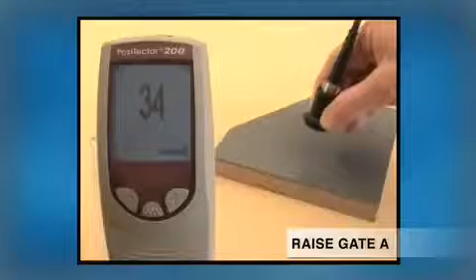First, let's explore why low measurement results occur in the first place. Microscopically, you can see the rough surface of this black coating on plywood. Under greater magnification, the surface texture on this red coating looks like hills and valleys. The dark lines in this photo are the scale markers from a destructive Tooke or paint inspection gauge. Let's discuss what happens when the PosiTector 200 measures surfaces like these.

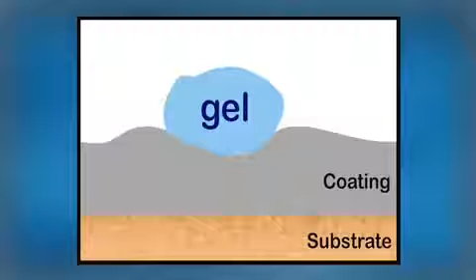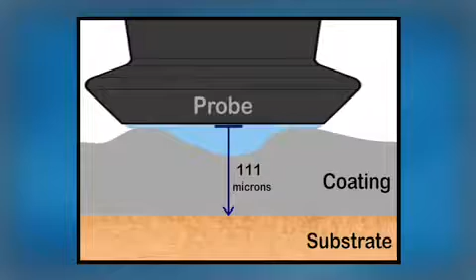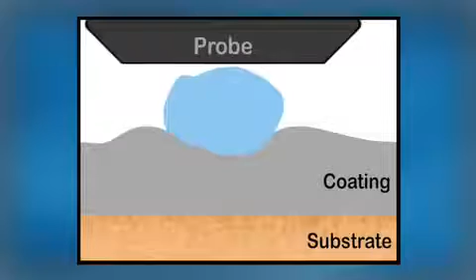When measuring ultrasonically, gel is applied to propagate ultrasound into the coating. When the PosiTector 200's probe is brought down, it rests on the peaks and attempts to measure the 111 micron thickness. In our example, the first measurement result was 34 microns. This is much lower than the expected paint thickness of over 100 microns. These low values result from the ultrasonic pulse reflecting off the surface of the coating rather than off the substrate.

A simple adjustment to the PosiTector's measuring gates prevents these occasional low results. Gates define the instrument's measuring range, and the user can adjust them. PosiTector 200B models have default gate settings of 25 to 760 microns. Gate A is the minimum thickness the PosiTector 200 will report. Gate B, the maximum. The default Gate B setting rarely needs to be changed, but a properly adjusted Gate A value is the key to successfully measuring rough coatings.

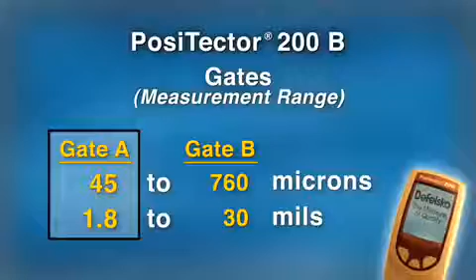In our example, we want the instrument to ignore the 34 micron surface roughness, so we change the measuring range to something higher than 25, say 45. Now, within the new measuring range of 45 to 760 microns, the 34 micron result is ignored, and the next loudest echo is reported. By increasing Gate A, we effectively tell the gauge to ignore the effects of surface roughness, because the PosiTector 200 can only report thickness values within its measuring range, or gates.

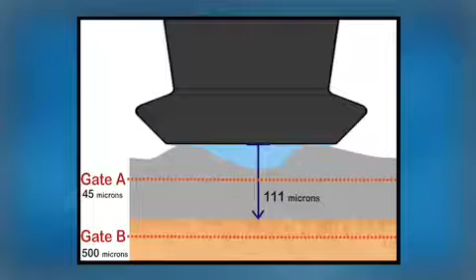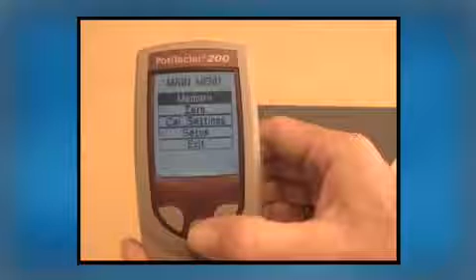Let's go over that again. The first measurement result is lower than expected due to surface roughness, so we need to adjust Gate A. Access the PosiTector's menu by pressing the middle button. Using the minus button, scroll down to Cal Settings. Press the middle button to select, press it again to select Gates. The default measurement range is approximately 25 to 760 microns. Using the plus button, Gate A is increased to 45 microns.

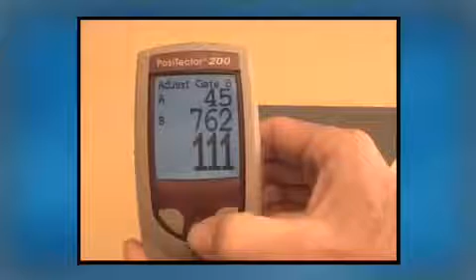Since the 31 micron measurement result is no longer within the gates or measuring range, the gauge immediately recalculates thickness using the next loudest echo. The thickness result immediately changes to the correct value of 111 microns. Measure again with the new Gate A value. Repeated measurements confirm that the PosiTector 200 is no longer influenced by the surface texture.

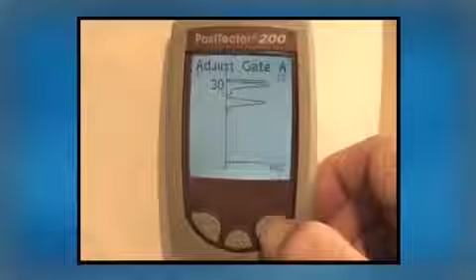Here's how the process of changing Gate A would look on a PosiTector 200B Advanced model. The graphical display shows two peaks, but since the surface roughness generated the loudest echo, that value was reported. When Gate A is raised beyond the roughness using the plus button, the PosiTector immediately reports the next loudest echo, the one that correctly represents the paint thickness at 111 microns.

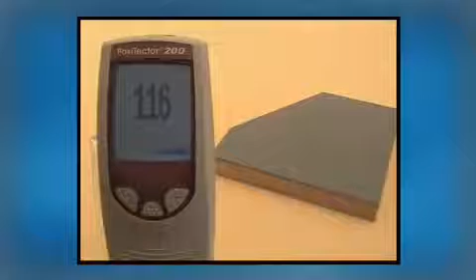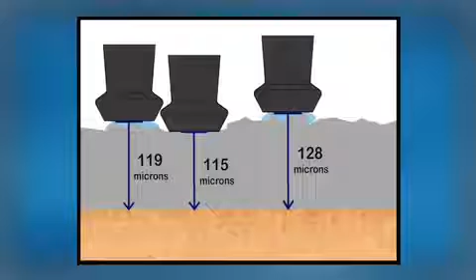The second rough coating issue an inspector has to cope with is apparent lack of repeatability, something that every coating thickness gauge must deal with. Notice how a series of measurements are not always the same, close but not perfectly repeatable. This occurs with any measurement technique. The degree of roughness can vary over a surface, and the instrument measures depth a little differently, depending upon if the probe is placed on the top of a roughness peak or lower, down in a valley.

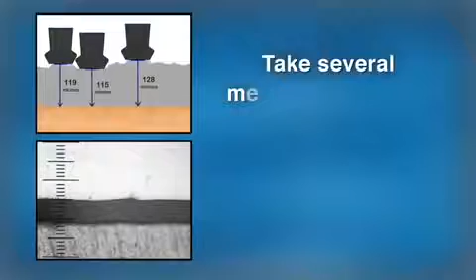Here's another cross-section image showing subtle surface roughness. International organizations such as ISO, ASTM, and SSPC have a universal solution for this. Simply average a series of measurements. All PosiTector 200 models have the ability to do this easily. Access the menu by pressing the middle button. Press the middle button again to select Memory, and again to select New Batch.

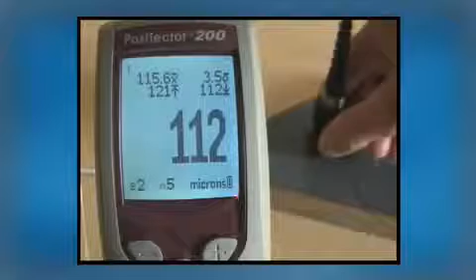The display makes room for important statistical values, including the number of measurements at the bottom center of the LCD. Now, as measurements are taken, a running average is displayed at the top left, along with minimum and maximum values. The large, easy-to-read backlit LCD provides valuable real-time information with each additional measurement. Outliers or bad readings caused by operator error can be deleted with the minus key.

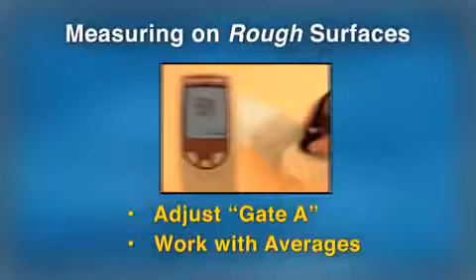After 8 measurements are taken, ranging from a high of 121 to a low of 112 microns, the average thickness is determined to be 116 microns. To recap, when measuring on rough surfaces, raise the value of Gate A to not more than half the expected coating thickness, and use memory to average a series of measurements. These two simple steps will provide meaningful thickness measurement results on coatings with rough surfaces.